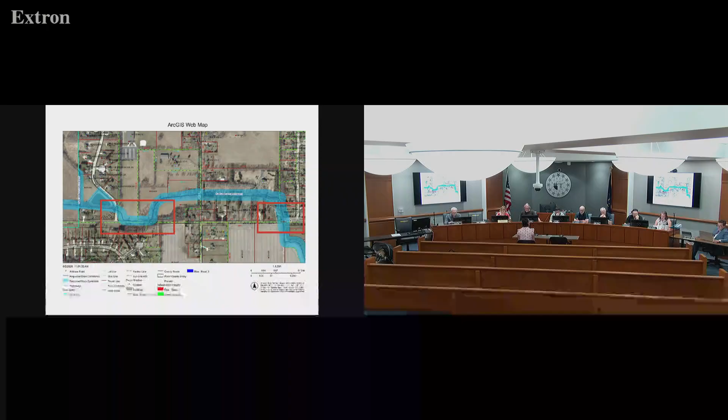So the applicant is proposing to place two new fiber optic utilities within the regulated drainage easement associated with and crossing Flint Lake Garden Terrace ditch. The work will include the installation of a new 2-inch Duraline Future Path 4-way conduit via horizontal directional drilling. They are proposing to install the conduit on the north side of County Road 400 North from Meadowbrook Drive to County Road 325 East, running parallel with Flint Lake Garden Terrace ditch, which is an open drain. That portion of the project will be within the regulated drainage easement for approximately 620 feet.

I would like to note that it's difficult to discern the location of the fiber optic utility in relation to Flint Lake Garden Terrace ditch. If the proposed cable is to be installed along the center line of ditch or under Flint Lake Garden Terrace ditch, then the cable shall be installed with a minimum of 5 feet separation from the invert of Flint Lake Garden Terrace ditch. If the proposed cable is to be installed along the top of bank, then the cable shall be installed a minimum of 5 feet south of the southern top of bank to provide adequate cover from the side slopes of Flint Lake Garden Terrace ditch and to prevent a conflict between the proposed cable and potential stream bank repairs. Additionally, a handhole will be installed between Meadowbrook Drive and Flint Lake Garden Terrace ditch, approximately 40 feet from the center line of ditch of Flint Lake Garden Terrace ditch.

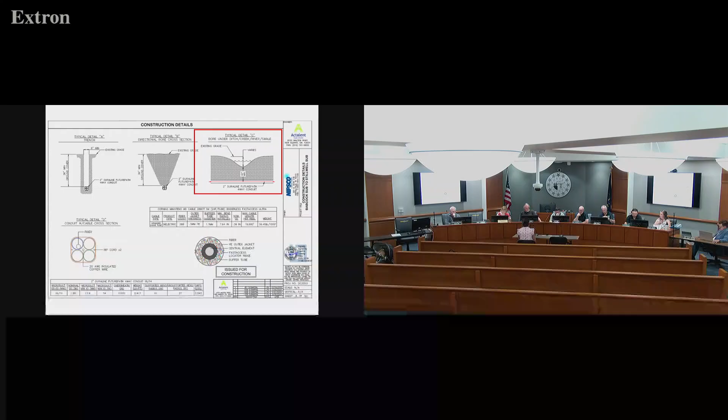At this time, staff recommends approval of the 2-inch Duraline Future Path 4-way conduit within the regulated drainage easement associated with and crossing Flint Lake Garden Terrace ditch. The standard terms and conditions apply, including the execution of a hold harmless agreement. In making an application to conduct the proposed work, the applicant has agreed to restore any disturbance to a condition as good or better than that found prior to the commencement of work.

Staff also recommends the following special provision be applied to this project. Contact the department at least 72 hours prior to the start of work within the regulated drainage easement so that staff may be present during the performance of the work. Staff notes that the applicant will need to obtain a permit for any work conducted within the road's rights of way. And that concludes my staff report. I do not.

Comments or? Will the cable be installed under Flint Lake Garden Terrace ditch along that portion between Meadowbrook Drive, the western portion of the work? Or will it be along the top of the bank? Do you know? I believe it's underneath. Which I don't have an issue with that if it's that 5 feet separation. Yes. Yeah.

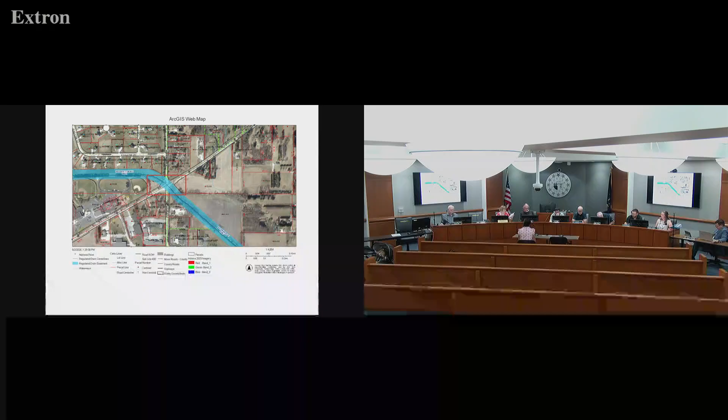This is the intersection of 400 East and State Road 2. This one is crossing Hutton Ditch Arm 2. If you go to the next slide, please, Melissa, you'll see the area where they are proposing to conduct the work. They are proposing to install this fiber optic utility on the east side of County Road 400 East and the north side of State Road 2.

A portion of this work will be in the regulated drainage easement associated with Hutton Ditch Arm 2. Staff, it doesn't appear that this work will impact the regulated drain or cross it, but a portion of it will be within the regulated drainage easement. Additionally, no handholes or receiving and jack and bore pits will be located within the regulated drainage easement, so there'll be minimal disturbance, but that utility will be within the easement associated with Hutton Ditch Arm 2.

Staff recommends approval of the installation of the Duraline Future Path 4-way conduit within the regulated drainage easement associated with Hutton Ditch Arm 2, including the standard terms, execution of a hold harmless agreement, and the same special provision that the applicant contact the department 72 hours prior to the start of work within the regulated drainage easement.

Do you have any questions? I did not. Any comments? Questions? Motion? I move that we approve SM-26-0009. Second? I'll second. Passed.

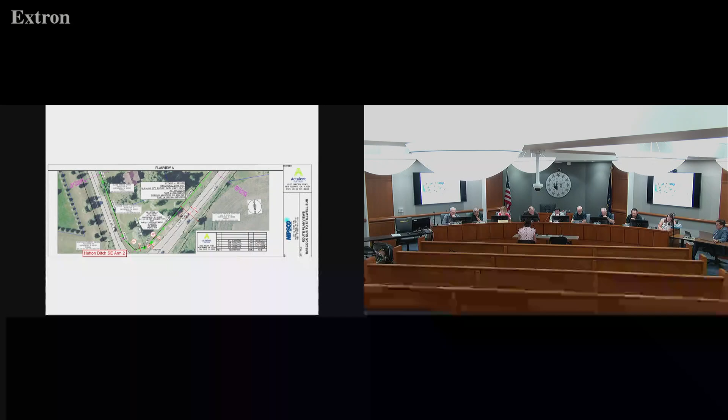Now we go to 0010. We didn't vote. We didn't do it all. We didn't vote, I'm sorry. Mr. Chairman, procedurally, you should do it all in favor or opposed. Yes, sir. All in favor? Aye. Aye. Opposed? Thank you.

Okay, so we on to the next one? Yeah. 260010. This is along County Road 400 North, approximately 800 feet east of State Road 2, crossing Hutton Ditch Arm 1. NIPSCO will be installing the fiber optic utility via horizontal directional drilling under Hutton Ditch Arm 1 with a minimum 5 feet of separation distance from the invert to the fiber optic utility cable.

Temporary perimeter sediment control will be installed around the work area to prevent the transport of sediment. At this time, staff recommends approval of the 2-inch Duraline Future Path 4-way conduit with the standard terms and conditions, including execution of a hold harmless agreement and the same special provision that the applicant contact the department at least 72 hours prior to the start of work within the regulated drainage easement.

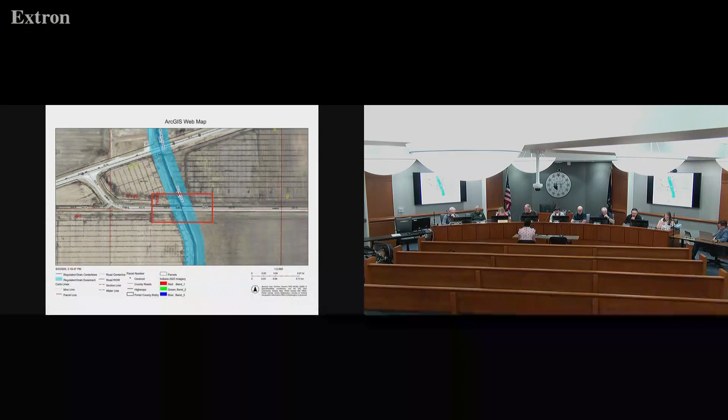Questions? Comments? I move that we approve SM-26-0010. Second. All in favor? Aye. Opposed? Passes.

We go on to the next one, 260011. I would like to make a note for the record, Councilman Vasquez has joined the meeting as well. Present. So this docket number, NIPSCO is proposing to install the fiber optic utility along County Road 400 North, approximately 3,300 feet east of County Road 575 East.

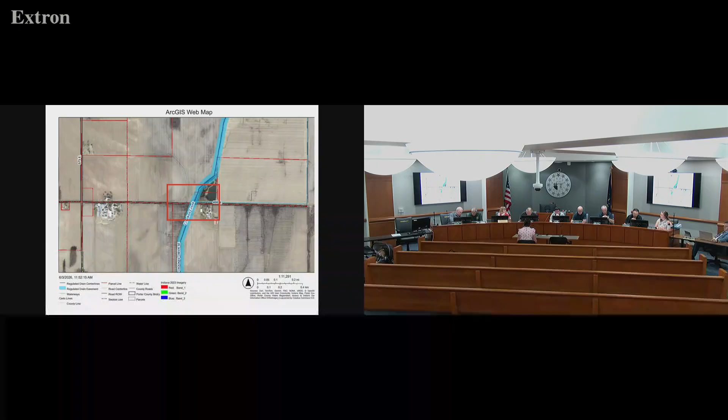They will install that new fiber optic utility under Crooked Creek, which is an open drain. It will be conducted via horizontal directional drilling on the north side of County Road 400 North, with a minimum of 5 feet of separation distance between the invert of Crooked Creek and the new fiber optic utility. Staff recommends approval of the installation of the 2-inch Duraline Future Path 4-way conduit with the standard terms and conditions, including execution of a hold harmless agreement and the following special provision: that the applicant contact the department at least 72 hours prior to the start of work within the regulated easement.

Questions? Comments? I got one question, for all of them. Is NIPSCO actually doing the boring, or do you have a contractor doing it? We will have a contractor. So does the contractor have to be noted here? They do not need to be noted in the engineering plans, but when we send out our environmental compliance plan, all of these factors are included, and they have to sign off on that, saying that they understand the rule.

Can you just explain what you're doing in the area, just so we have context? Sure. One of the key things that we do to increase reliability across our substations is connect them with an underground fiber route.

There is almost an underground fiber route connecting all the substations, or will be by 2028, likely, depending on project variation. The goal is so that the substations can communicate with each other, so if there is ever an equipment failure, a different adjacent substation can pick up the feed so customers do not lose power.

They're closed systems, so only NIPSCO is able to contact each other. There's no outside source; nobody else can get this feed. One of the reasons we install the 4-way conduit is so that if there's ever another project, or we need to tie into that, we don't have to run an entire new line. We can borrow one of the other 3 slots. Good idea.

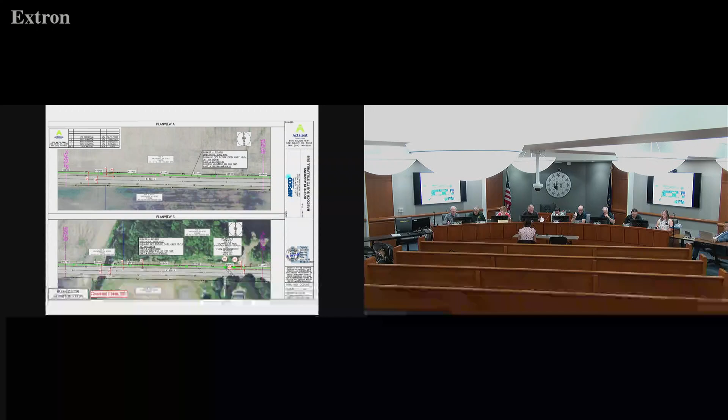And now we're down to 26-0012. So this one is different. The applicant is NIPSCO.

They are proposing to retire an existing gas main and install a new 6-inch plastic gas main under Phillips Ditch, at the intersection of State Road 8 and County Road 150 West, to accommodate the State Road 8 small structure replacement project. The applicant is proposing to place one new gas main under Phillips Ditch, an open drain, to accommodate the recently approved INDOT small structure replacement project carrying State Road 8 over Phillips Ditch.

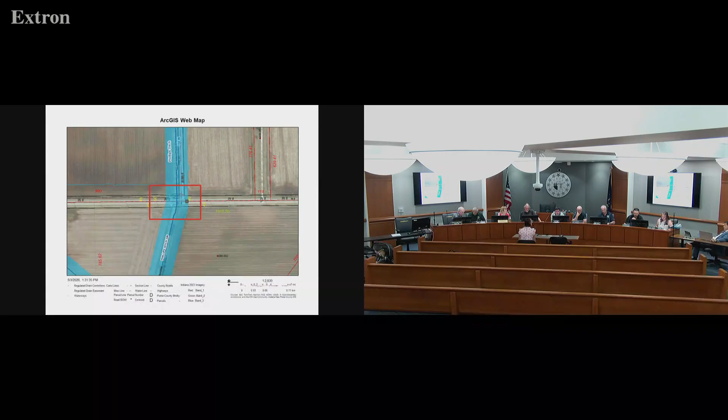The work will include installation of a new 6-inch plastic medium density polyethylene medium pressure gas main via horizontal directional drilling. The applicant is also proposing abandonment in place of the existing 3-inch plastic gas main within the regulated drainage easement. A minimum 6 feet of separation distance between the proposed new 6-inch gas main and the proposed reinforced concrete box structure will be provided per the construction plans. The jack and receiving bore pits will be located outside the regulated drainage easement.

At this time, staff recommends approval for the abandonment in place of the existing 3-inch gas main and installation of the proposed 6-inch gas main under Phillips Ditch and within the regulated drainage easement. Standard terms and conditions shall apply, including execution of a hold harmless agreement between the applicant and Porter County. Staff also recommends the following special provision: contact the department at least 72 hours prior to the start of work within the regulated area. That concludes my staff report.

Any questions, comments? The existing 3-inch, what does that abandonment look like? Does it get cut, purged, capped? Yes, they will cap it in place.

They do testing on all of the abandoned pipe also to make sure it's not contaminated with something. Sometimes that can be in very old pipes, so they test them all first to make sure. Do they move the pipe or just leave it there? They will remove it if it is contaminated; otherwise it just stays in the ground.

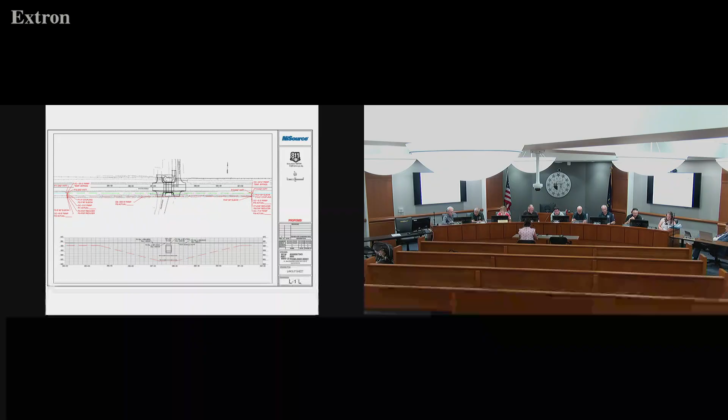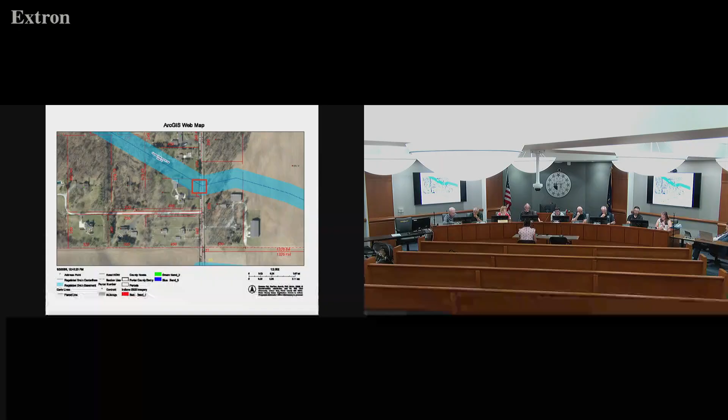So the applicant is NIPSCO. They're proposing to retire and replace an existing utility pole and as-needed tree trimming crossing Ludington Ditch Arm 16 along County Road 200 West. The particular project location nearest address is 394 South, 200 West. The applicant is proposing to retire and install one new utility pole on the west side of County Road 200 West within the regulated drainage easement associated with Ludington Ditch Arm 16, which is a closed drain or drain tile. This is part of the TDSIC PRP Valparaiso PK17 D13 utility improvement project.

Construction access to auger the hole and install the new pole will remain from County Road 200 West. Pole 441-084 appears to be located north of Ludington Ditch Arm 16, which is a 12-inch vitrified clay tile, or VCT, drain tile. The proposed pole placement is approximately 2 feet south of the existing utility pole location. Any damage to Ludington Ditch Arm 16 caused by the installation of the new utility pole shall be repaired by the applicant.

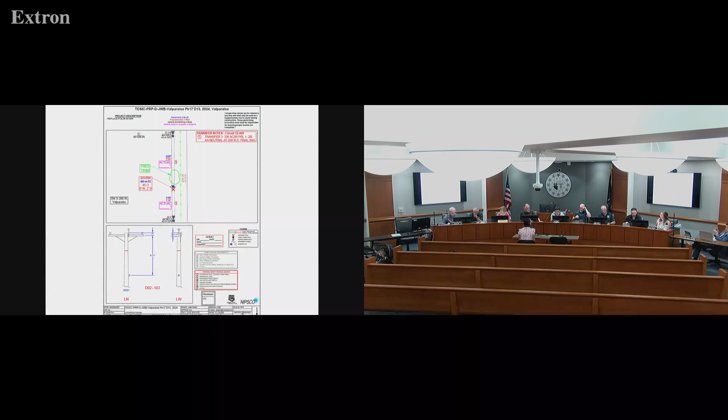Melissa, if you could please go to the previous slide, sorry. So that darker blue line in the center of the blue shading is the center line of the easement. Staff has done some drain tile flagging in this location, and the drain tile does fall fairly close to the center line here. So we don't foresee any conflicts, but just noting that if your pole location changes or if you encounter the drain tile, please contact us, and NIPSCO will have to repair that drain tile.

Okay, would you like to see potholing ahead of time for this project? I don't think it's necessary, not with us knowing where the drain tile is. Okay. And I also don't think that would really be practical for your scope of work, where you're going to auger the hole. So it might compromise the integrity of the utility pole.

So staff recommends the approval of the removal of the existing utility pole and installation of the proposed utility pole within the regulated drainage easement associated with Ludington Ditch Arm 16. The standard terms and conditions apply, including execution of a hold harmless agreement. Staff also recommends that the following special provision apply to the project: contact the department at least 72 hours prior to the start of work within the regulated drainage easement. And staff notes that you'll also need to obtain a permit for any work conducted within the road right of way. And that concludes my staff report.

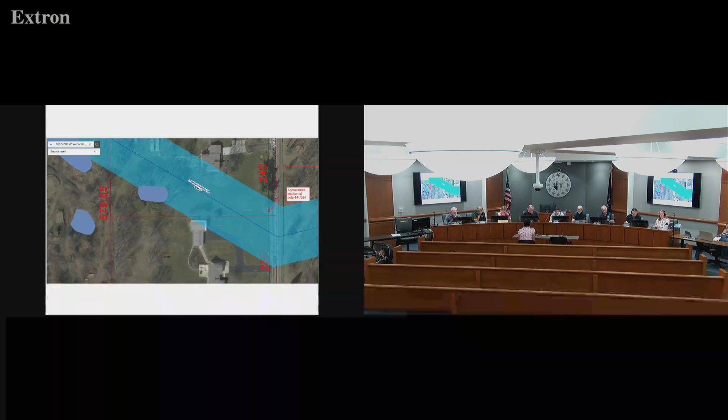Okay, that one passed. So I guess all that's left is the manager's report. Yeah, and Rachel, all these cases will be presented to the Stormwater Management Board at their meeting on June 23rd at 9 a.m. You're welcome to attend, but it's not required. And the hold harmless agreement will be sent to the project contacts following that meeting.

Perfect. Thank you. You're welcome. Thank you. Thanks for having us. Yes, thank you for being here.

All right, and then for my program manager's report, I just would like to provide an update with our capital improvement project, P26-024 for Rolling Meadows subdivision, the Stormwater Management System Improvements Project, Phase 1. You'll see the small location map at the top of the screen. This just gives a general project location. We are between Aberdeen and Sherwood Forest subdivision, just off of County Road 325 West and just south of County Road 100 North.

And then the larger location map at the bottom of the screen, the red boxes that are along the fingers of the street, as I call it, subdivision. This is the limits of the storm sewer replacement. So I've talked about this project before, but just a reminder, we are installing all new storm sewer from the detention basin at the far eastern limits along Angelica Drive. So the southeastern portion, or the bottom right-hand corner of the screen, that last red box there.

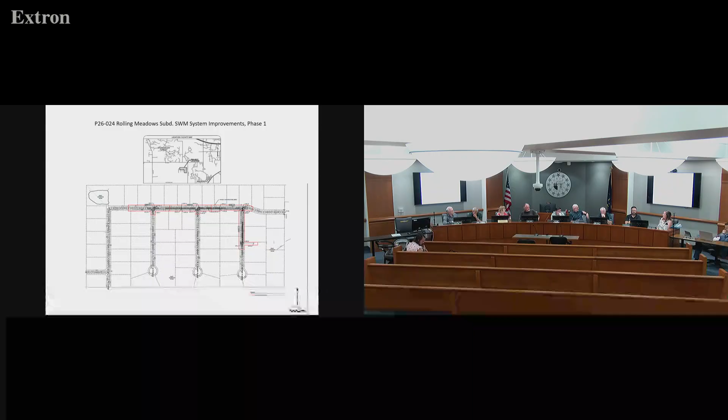And then that will be 30-inch concrete storm sewer. And then it reduces down to 12-inch storm sewer as we move further west, or to the left-hand side of the screen along Lagira Drive. So construction started beginning of May, so a couple of weeks ago. So if you go to the next slide, please, Melissa.

So once it stops raining now this week, they'll get out of this intersection. Once they get this portion of work started, they need to have really good dry weather for a day. That way they don't shut down Lagira and Angelica and get themselves into quite the pickle. So minimal work was done today, but like I said, once we get a little bit of a drier weather day, they'll get out of this intersection and then move down along Lagira.

Gary Construction is the contractor. So far, the work has progressed well. And then we have Burke Engineering on site. They were the engineers of record and designers, and we have part-time construction observation with them. So, so far things have been going well. So I will knock on wood that way.

What's the estimated life of a system like this? 50 years is what they say, but I think 100 would not be unreasonable. And we are doing our standard bedding and initial backfill. So underneath the 30-inch pipe is 6 inches of bedding, and then the minimum bedding as we go to the 12-inch is 3 inches, and then 1 foot of number 8 stone above the top of pipe, and then backfill with 53s, and then our asphalt. So a nice stone envelope surrounding the pipe, which increases the service life.

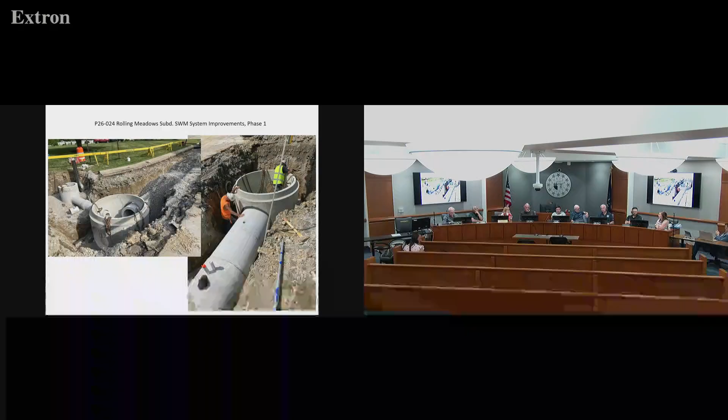And then we are doing this as a joint project with the highway department as well. So for our stormwater portion of the work, where we disturb the pavement, it will be paved to the intermediate course. Then the highway department is going to mill and resurface the remaining streets, and place the asphalt surface course on our portion of the work as well. So that's a cost savings for us out of the stormwater fund, working with the highway department to team up on these types of projects as we go through this. And with that, that concludes my program manager's report.